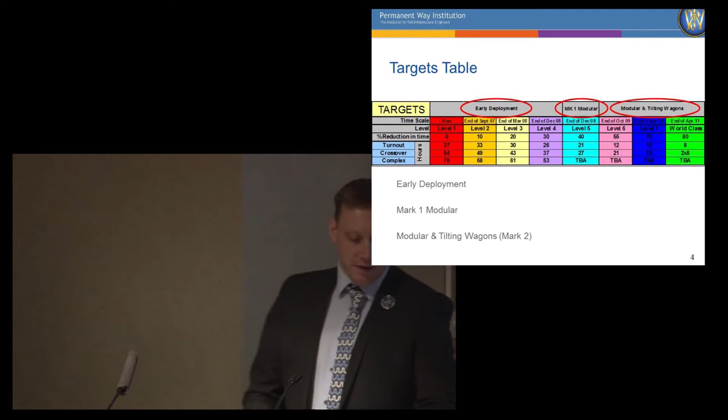Just to give you a quick overview of what the table represents, it's split into 3 sections. The first section being the early deployment, the second being Mark 1 modular, and the third being modular and tilting wagons, which I'll explain in a little bit more detail in a moment. If we just look at the top there, the level 1 on the red on the left-hand side, what this was basically about was installing the turnout there, as you can see on the left.

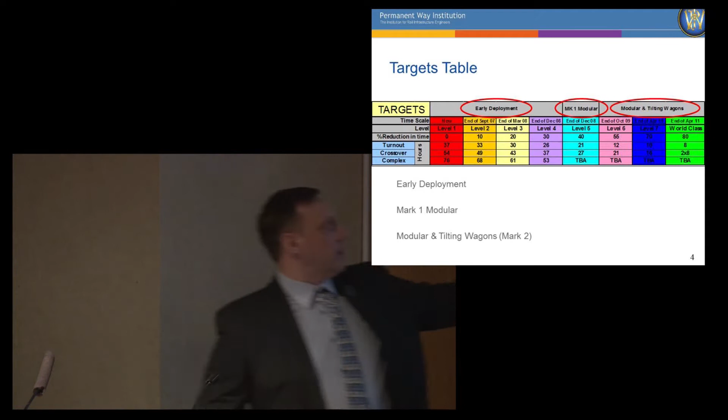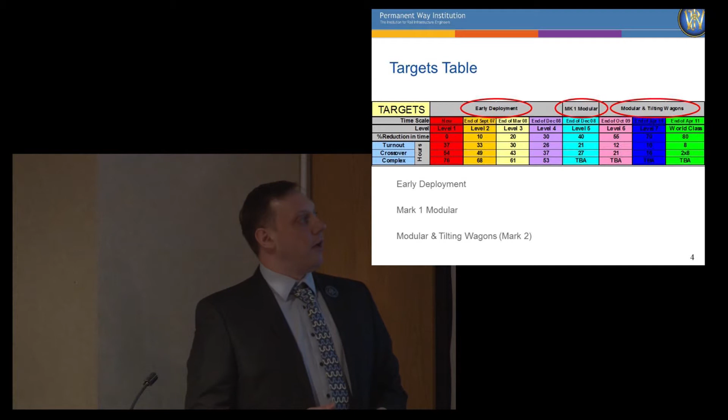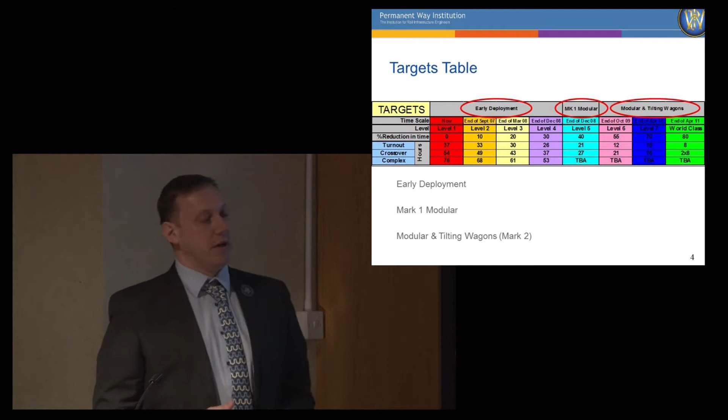In 2006, we were commonly installing a turnout in 37 hours, and again to suit the 7-day railway aspirations and benefit from the modular tilting wagons all the way across to the right-hand side on the green, on the same level of the turnout, we were looking to deliver world-class track renewals in 8 hours, 8-hour possessions, which is basically an 80% reduction in time. So that was the challenge, and everything in the middle were the steps towards achieving them.

So if you look in a little bit more detail at early deployment, the first phase. Early deployment, the dates for achieving some of these targets was 2006 to 2008. And it was generally surrounding behavioural changes only. There were no real new tools or plant, no new processes or technologies. It was all about getting smarter and challenging production rates. So like it says, it was behavioural changes.

Progress Rail were kind enough to allow us and Network Rail to use their facilities at Beeston, where we could go down and basically a big train set was there and we could play with production rates, machines, trains, you name it, and we could benefit from that. Thanks to Roy and the team and Tim for allowing us to use Progress. We got good.

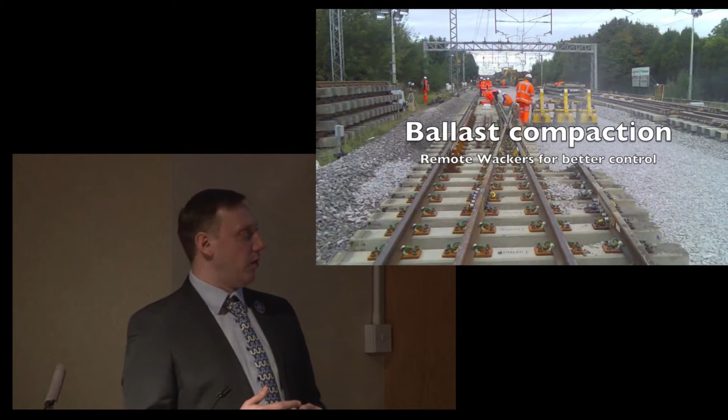Tandem lifting, we had individual lifting beams, which was harder to control before the introduction of the modular beam. But again, a benefit, the 3D ballast control gave us great ballast levels. We introduced the guide plates for quicker installation of panels, and the ballast, nothing new really, other than the technology behind the remote triple Wacker systems giving us great ballast compaction. So they're just a couple of pictures of Crewe Coal Yard and Mossband.

So, the final stage of modular was the Mark II modular. Target date to achieve some of these was October 2009 to April 2011. Again, modular split bearer, and it was the introduction of the tilting wagons themselves. It was where things got a bit more exciting and competitive, if you like. There were challenges, and it was definitely a great honour for Babcock to be one of the first contractors to install this. So we were looking forward to that.

They were installed on site generally by Tandem 250 system with the modular beam. Like I said, the introduction of the modular beam came then, and it's where all previous training was put together to create the most efficient work site.

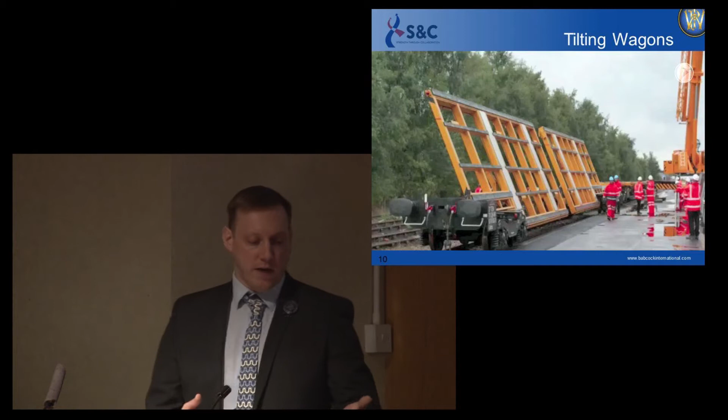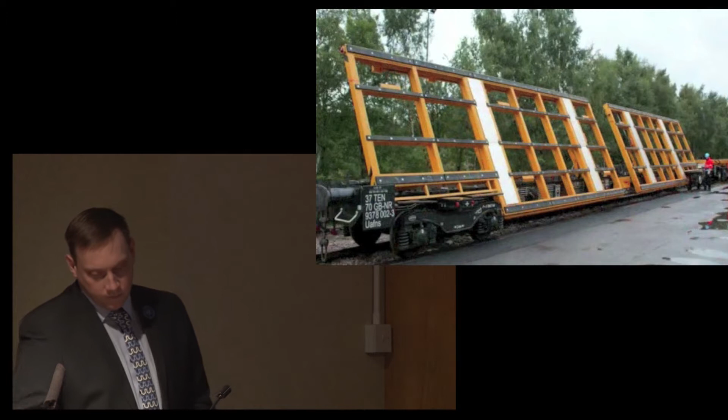Okay, for those that don't know a great deal about the tilting wagons, I know they've been around for some time now. Some people may have had the opportunity to see them, some people may not. I've got another video here that demonstrates what the tilting wagons look like and how they operate. So they're just in the tilting mode that's engaged to get to site at the moment. Just a few captions on there, highlighting the modular beam. Then the cross beams attached to the modular beam.

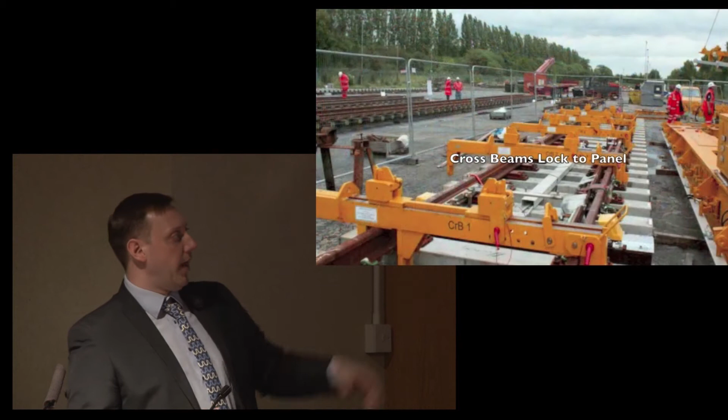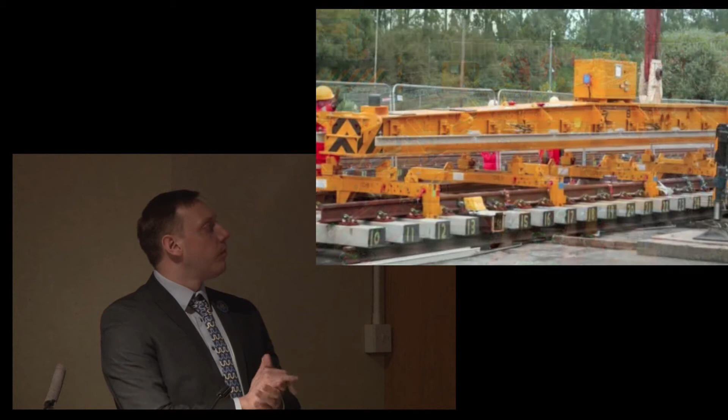The cross beams actually lock into the panel, and then the modular beam comes and locks onto the cross beams. And then the cross beams actually lock to the tilting wagon itself. Locks the panel to the tilting wagon. And this is actually the tilting wagon in action. Tilting to the transit position, it says there. It is being lifted there.

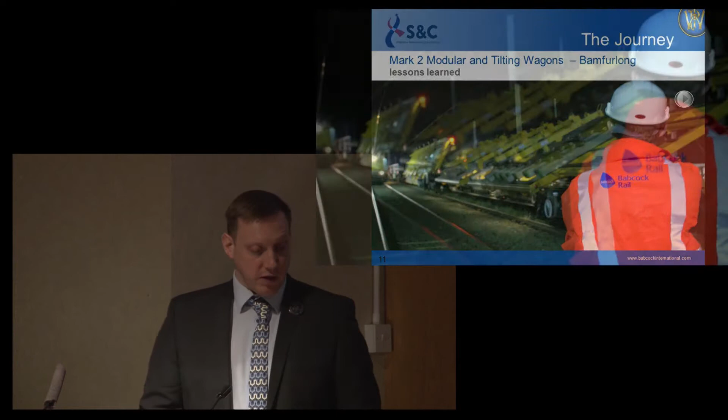Tilting wagons before? There you go, that's how they operate. Moving on. As Roy mentioned at the beginning, as he introduced me, the first site in the UK to receive the modular system by tilting wagons was at Bamfurlong in October 2009. I've mentioned already that Babcock wanted to be the first contractor to install that, and I was over the moon to be one of the engineers to contribute to the planning and the delivery of that site.

Another thing that we had to pay attention to was considering the wagon slew. As the wagons go flat, they slew out to the left or the right. We need room to run the gear off cranes or whatever up and down one side, and make sure there's nothing in the sets to foul, or even if we work in ALO. As I said before, this was the introduction to the Trimble equipment, using 3D surveying equipment. Just a picture there of the rail front that we're trying to set out.

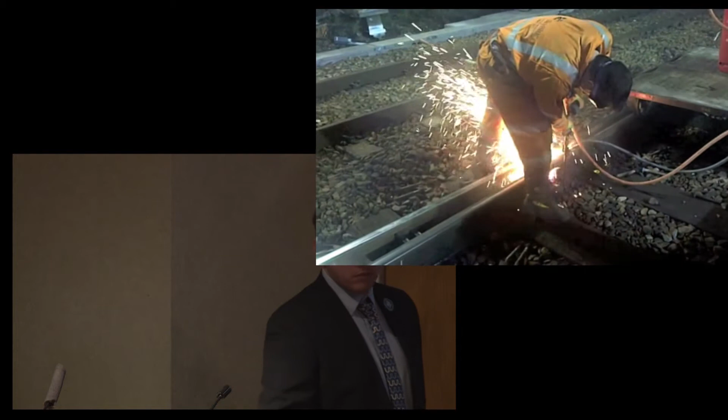So yeah, no flame cutting. Just stress the fact that every first cut that we do is always flame cut, so any stress in the rails disperses in a controlled fashion, rather than if you cut through with the disc cutter, it just snaps open. We do use both from the initial flame cut. Just showing you there that the chosen scrapping out method was using one of the Kirow 250s, which we use over end, and the 3D formation there, showing the dozer pushing through, controlled by the 3D, giving us quite a decent formation level.

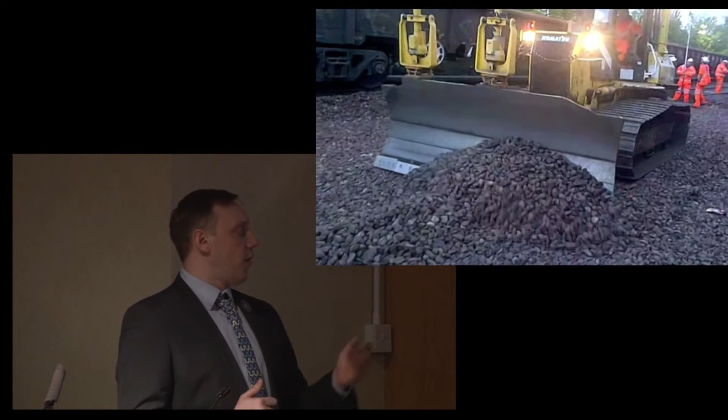And we've got the same 3D controlled bottom ballast. One of the benefits for me: when we used 2D lasers, we used to have to do what was called a blade and a half pass, because the blade itself isn't as wide as the pig, so you have to come back and do a half blade pass. When you did that half blade pass, it always used to leave an irritating little ridge down the middle that you just couldn't quite get rid of. So the 3D Trimble's got rid of that, which is obviously a great benefit for the modular installation.

And that's literally the first panel coming off tilting wagons there, being loaded at Babcock. So that's the first switch panel on the ground from tilting wagons.

This is going to keep going on, isn't it?

Bamfurlong did receive some press. You know, it was a very high-profile site, being the UK's first tilting wagon. So we did get some press release that I thought maybe to show. Wigan says it was 21st century track relaying. We had got onto Network Rail's website: Wigan wagon rolls out renewals in record time. Say that after a fight or two.

Rail infrastructure: first modular switch and crossing installation was undertaken, and then one that I'm proud of because I took that photograph, Rail Engineer: tilting wagon delivers milestone. So that kind of shows the excitement and importance of that.

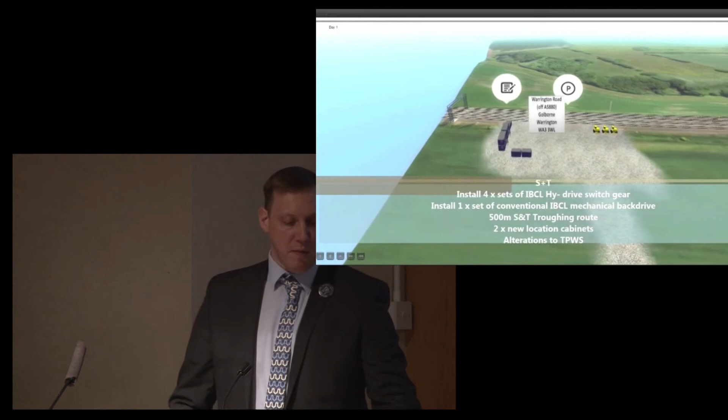I think I'll stop it there anyway. That's basically the end of the first site at Golborne. It goes on to show the other 3 sites of the West Coast Main Line, but you get the general concept. It gives people a quick and concise overview of the actual geographic location of the site, where the welfare facilities and access are located, and also the work content. Quite a simple concept, but it did provide the overview that we ultimately wanted.

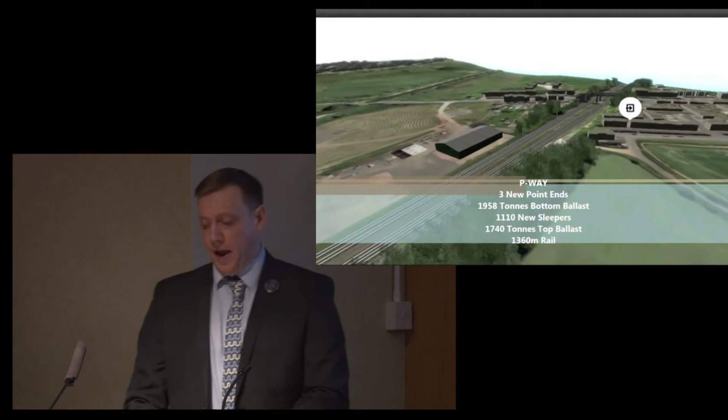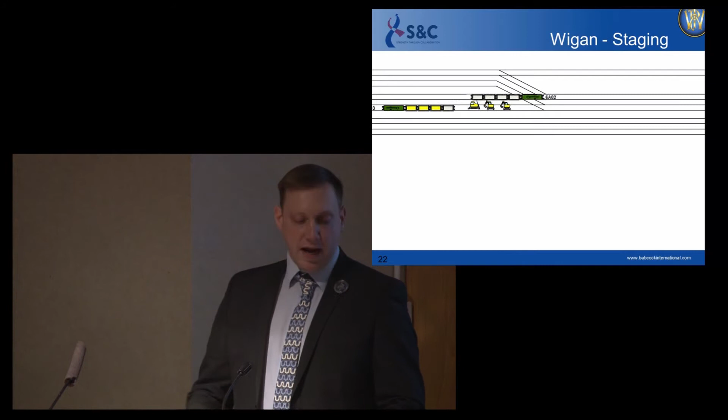I'll touch a little bit more on that in a moment, but we then went on to speak to Salford to work on how to better demonstrate methodologies. Historically, methodologies were presented in this kind of format. So in the whiteboards, to present how we actually carried out the track renewals and what process it followed, we just show simple Microsoft PowerPoint presentations that show where trains, where machines are supposed

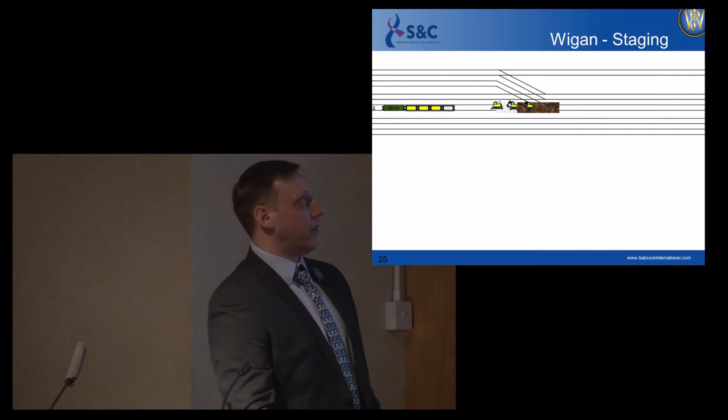to come from, and then it basically just follows the linear process of how we start scrapping materials out to trains, how we start digging, and then, like I said, it works through in a linear fashion. Very simple, but that's really the idea, and it helps people understand exactly where trains and how plant and things operate and move on site.

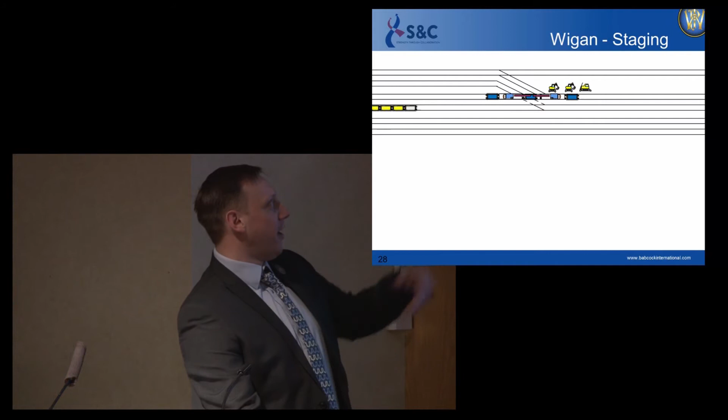And that simulates machines magically moving across the rails. And also the installation, yellow highlighting tilting wagons, installing the S&C there. So quite a powerful tool really, simple but quite powerful in the ability to demonstrate exactly how we're carrying out the track renewals works. Another tool that we use, and we've used for some years now, is the bar charts.

These bar charts will literally go down to 3 minutes for every activity, including disc cutting, flame cutting, and all the methodologies and how we're scrapping things out and how long they take. So them two combined actually create quite a powerful tool to demonstrate how we're carrying out the works.

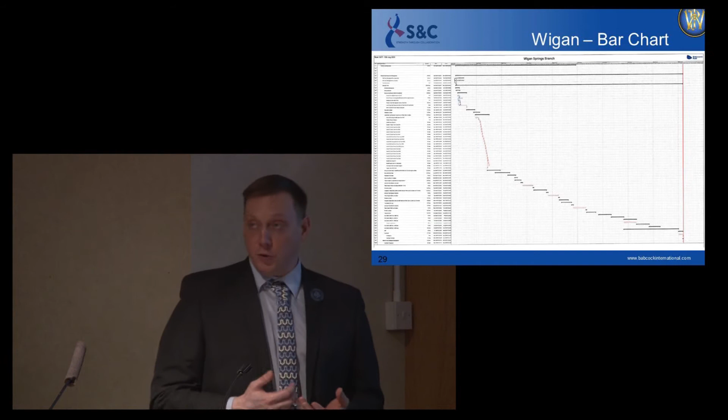Just going back to what I was mentioning about Salford University, we wanted to combine the PowerPoint and bar chart to produce a 4D virtual model to interact with, to learn and to monitor progress. So after lots of hard work alongside Salford University, we've been able to produce this following footage. Again, this was with BIM in mind, just to introduce the virtual aspect of track renewals, to give people that overview.

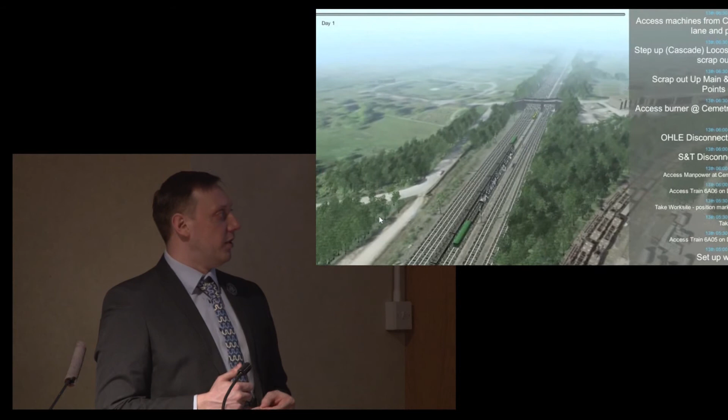So this is Wigan Springs branch. We'll stick with Wigan Springs branch now for the West Coast Blockade. It's going to be the focus in the remainder of the presentation. People may be wondering what the 4D, the fourth dimension, is to 3D. The fourth dimension was the addition of time. On the right hand side you can see the activities being undertaken on site. So there we're loading scrap rail, sleepers and S&C to train 6A02.

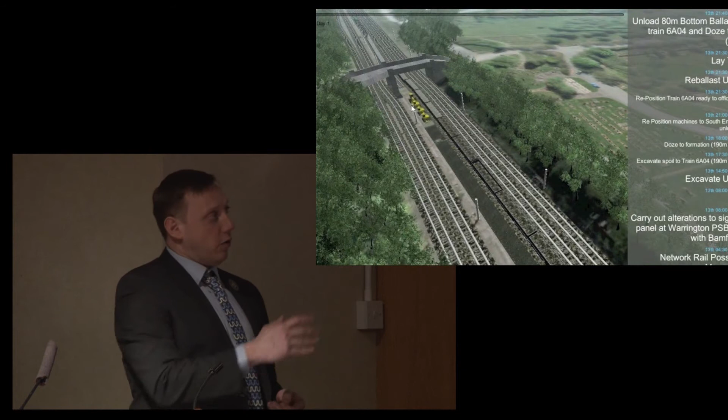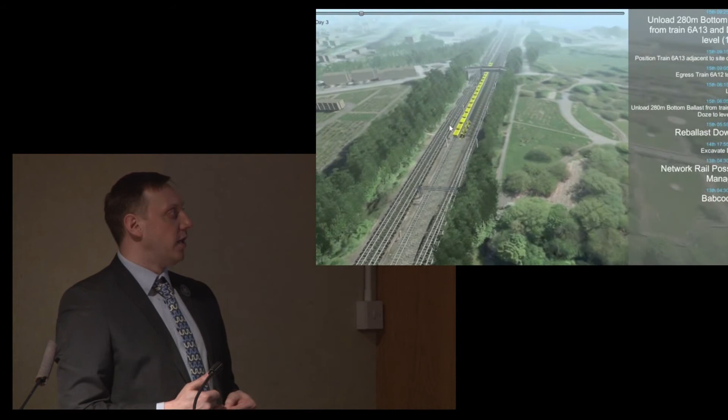That information was taken from the bar chart, incorporated into the staging videos, and everything's running in real time. So one of the benefits from this is it paints a picture for people along with the time. People were able to take this video away and learn the blockade in their own time if they liked. But it definitely painted a picture of how the 4 sites combined were going to be implemented.

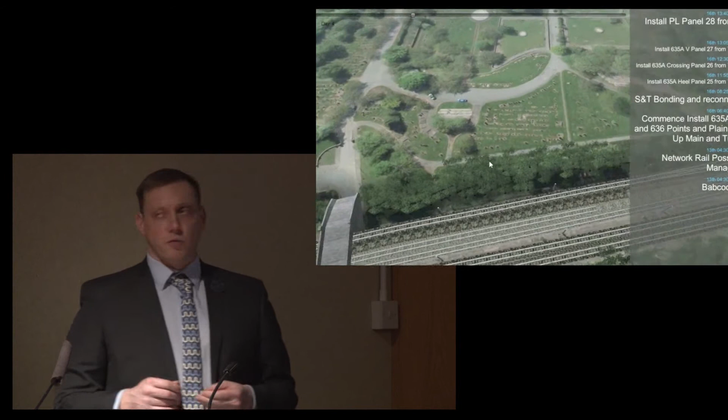Going forward, we want to adapt on this and continue to use this method of demonstrating methodologies. What I'd like to see is in operations rooms, such as those at West Coast Mainline, to be able to run this video footage in real time, so that people inside can see exactly what's supposed to be happening on site at what specific time.

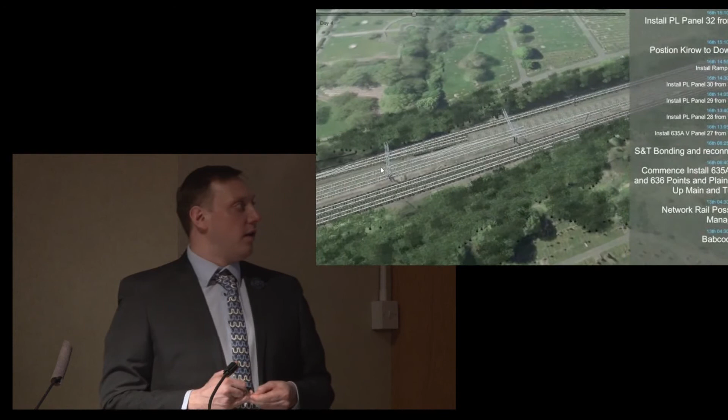I'd also like to adapt it in a way that, should there be any program slippage on site, there may be some form of input mechanism to the software to calculate a new methodology or strategy going forward and see what impact that has on the site, whether it would overrun or be completed successfully. I'll continue to work with Salford University to adapt and introduce that technology as soon as I can.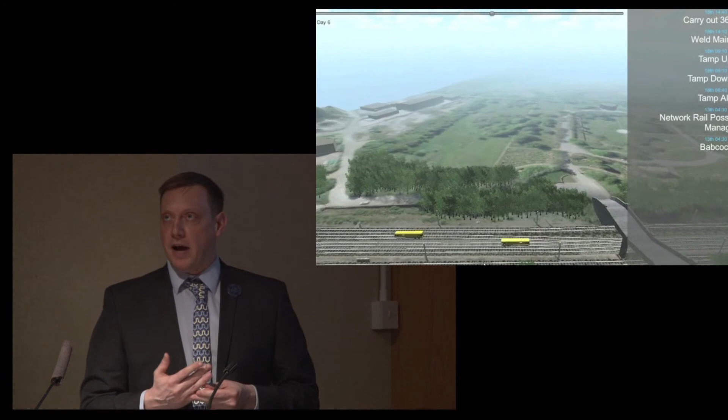So you've seen how we've used some of the management techniques and new technologies to plan the blockade works. I'm going to stay with Wigan Springs branch till the end of my presentation and discuss the 80-mile-an-hour handback that we achieved in July last year. So if we move on through the presentation, that gives the existing speed diagram at Wigan Springs branch.

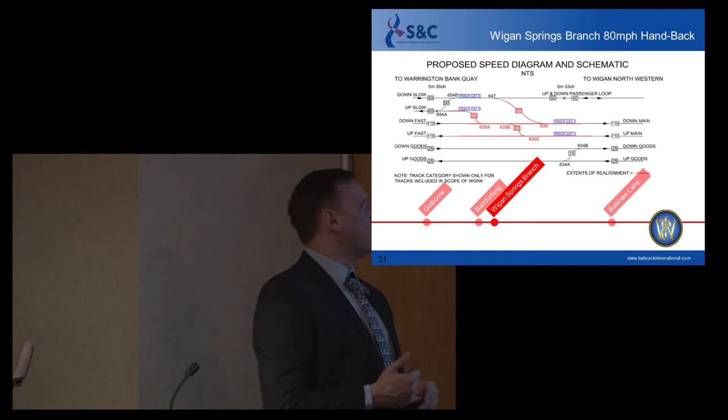It shows you basically a double junction there with 50-mile-an-hour turnouts, 110 mile an hour on the main lines, 50 and 60 mile an hour respectively on the down slow and the up slow. That's the proposed track layout. You'll notice that there's no real requirement for speed increases. It's basically opened out into a series of turnouts and a crossover for passenger comfort and better maintainability.

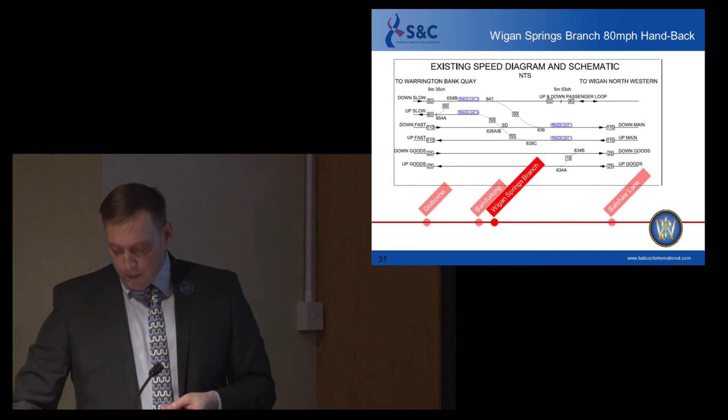So, moving forward, we had to plan how we were going to adopt the 80-mile-an-hour requirement. We were challenged to open 80 mile an hour TSR following S&C renewals at Wigan Springs branch. We asked why it was Wigan Springs branch, and the reasons being that there was no poor formation history, it was on a straight track geometry, and it was on one gradient. It was also at the front end of the programme where adequate time was available for multidisciplinary works, and also it gave us a bit more time to dedicate to track quality.

So the strategy was to engage industry experts and key suppliers, including Babcock, Network Rail, Korec, AP Webbs and A-Plant, amongst other people, but these were more the people that could actually have an impact on site. We established workshops and discussion groups early in advance so everybody knew exactly what the mission was and how we were set about to achieve them objectives.

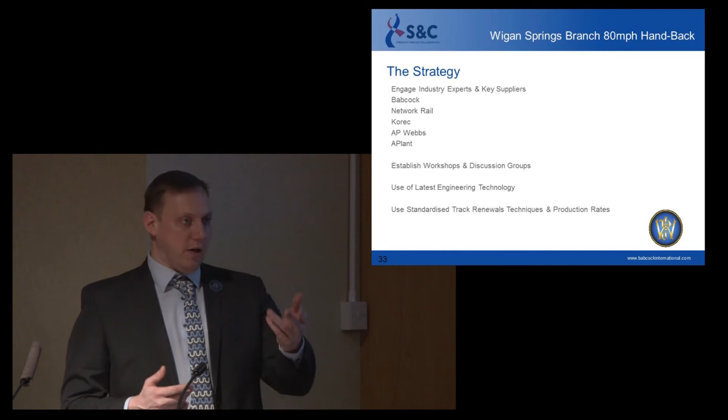I mentioned before that we use latest engineering technology, including 3D and Trimble. An important one at the bottom was just using standardised track renewals techniques and production rates. Again, we weren't using anything out of the ordinary. It was just something that we adopted from the early deployment and modular days that we stuck with where we get best efficiency. Can't forget the teamwork.

We had a dedicated team of engineers and site managers, dedicated plant operators, and track gangs and dedicated Kirow operators as well. They engaged in regular team meetings and briefings to understand their responsibilities and requirements. So everybody kind of bought in early, like I've said, and understood the process through to the end.

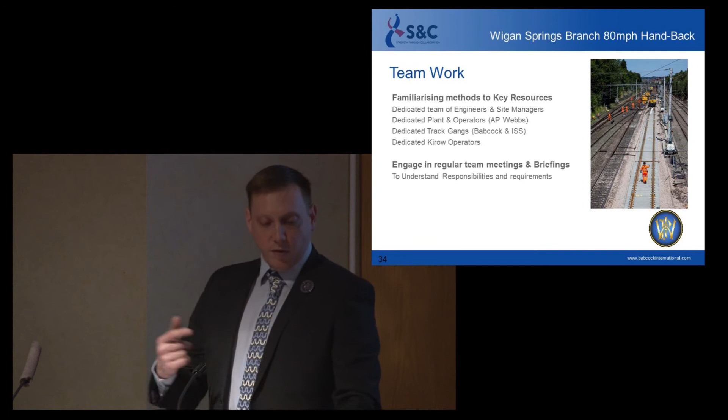When we look at the project delivery, as far as excavating and bottom ballast goes, we use Trimble 3D SCS900 dozing to achieve design levels and automated dozing. The design has also included ballast ramps within the dozer files, something that's caused us some problems over the past where we're spinning dozers and trying to sort out ballast ramps. They're actually included in the dozer file, so the dozer can actually follow and put the ballast ramps in itself.

We engaged AP Webbs operators for best production rates. So in essence, we just got the best people for the job on site to get the buy-in and the best production rates. We used the triple whackers for even compaction. We even whacked the ramps. Just a comment there that I've missed. We also adopted 2D lasers as a backup. Everything was set out at 5 metre offsets as opposed to the normal 10 metres on a straight that we adopt, and that gave us better track alignment and levels.

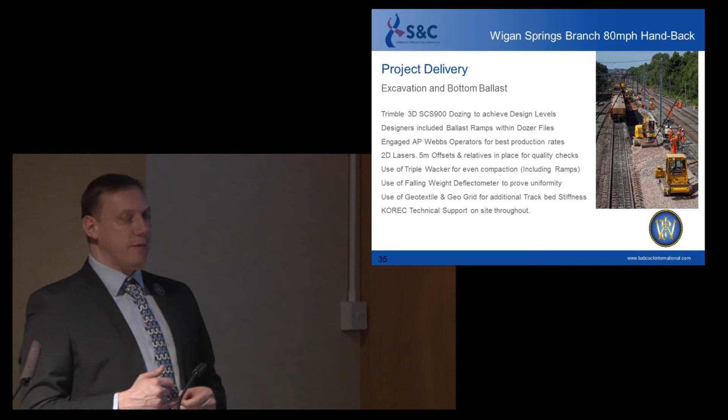And we also introduced the falling weight deflectometer to prove uniformity. I'll touch on that in a moment, but the falling weight deflectometer just measures the stiffness of the ballast. We also used the geotextile and geogrid for additional track bed stiffness where required. And an important note there that Korec, who provided all the Trimble gear, were on site 24/7 with technical support, because we understood the importance of having to install the track with the 3D equipment. So just a quick demonstration of what the falling weight deflectometer is.

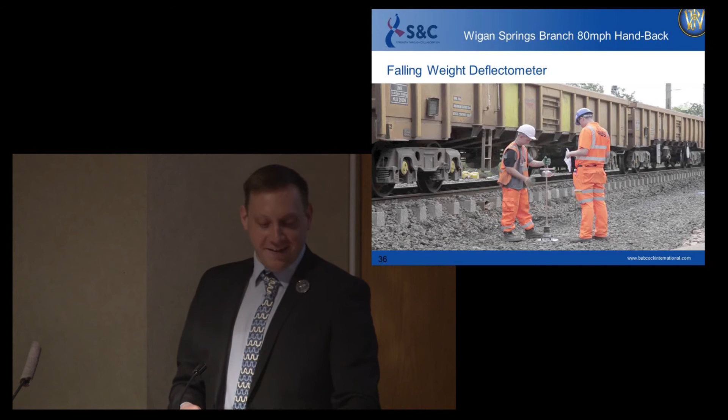Right. This is the best one. Slow motion.

I actually did a PWA technical seminar up in Glasgow a couple of weeks ago, and it did raise quite a lot of interest, the falling weight deflectometer and how we used it. I'll go through it in a little bit more detail in a minute.

You don't want to see it again, do you? Do we? Just catch up.

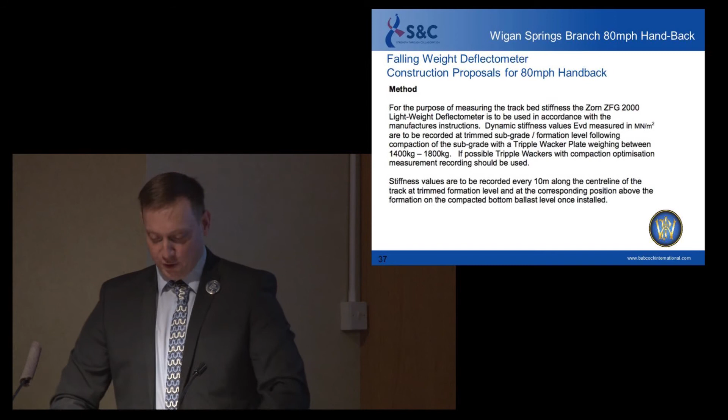So, this was an extract from construction proposals for the 80 mile an hour handback that was put together by Colin McAteer, one of our engineers, and it basically says, for the purpose of measuring the track bed stiffness, the Zorn ZFG 2000 lightweight deflectometer is to be used in accordance with the manufacturer's instructions. Dynamic stiffness values are measured in meganewtons per metre squared and are to be recorded at trimmed subgrade formation level following compaction of subgrade with a triple Wacker plate weighing between 1400 and 1800 kilograms. Stiffness values are to be recorded every 10 metres along the centre line of the track at trimmed formation level, then the corresponding position above the formation on compacted bottom ballast level once installed.

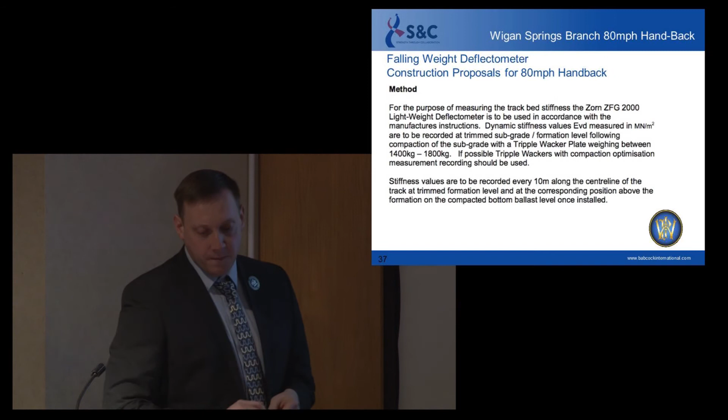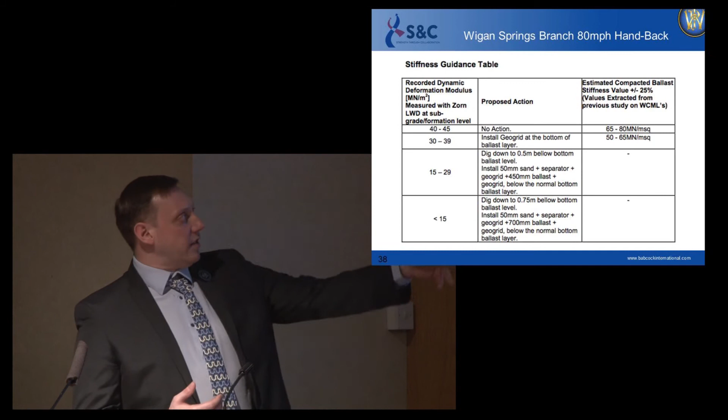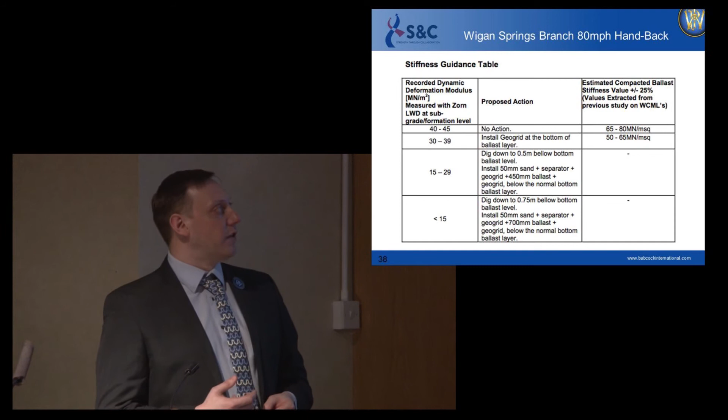There's different proposed actions as we get better track stiffnesses, but generally on the right hand side there, we've got estimated compacted ballast stiffness values from previous studies of the West Coast main line, and they were generally coming out between 50 and 80 meganewtons per metre squared. So they were just guidelines really.

So again, it was more the uniformity. We were using the weight deflectometer to measure through the site to make sure that each spot that we were measuring was giving us the same values. And it was about collating data this time round rather than using fixed data to prove actual ballast stiffness.

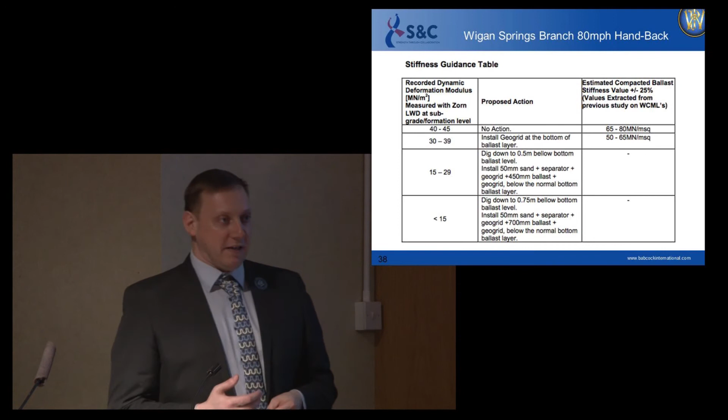So, S&C installation onto the new ballast bed. We just adopted the normal tilting wagon delivery. We used the Kirow 250 tandem installation, and all the track panels are pre-built at the suppliers and delivered direct from the manufacturers for better quality. All the installation was Trimble guided again.

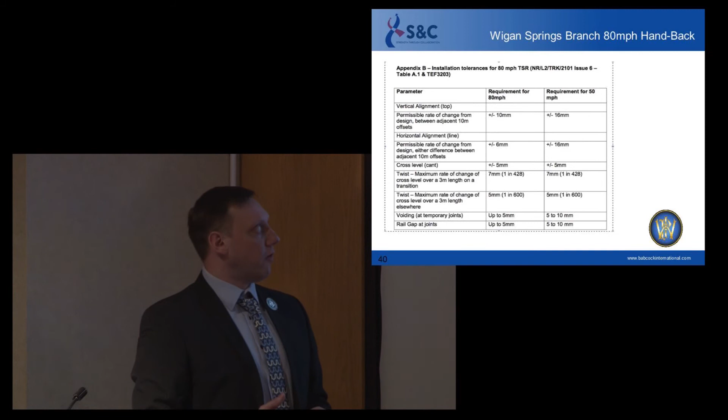Top ballast was distributed in the same way as normal from auto ballasters. Construction tamping by two S&C tampers that were connected to tandem tamp through the S&C long bearer section, connected through the umbilical cord. And the front offset files were created again on the ALCs, an automated device on the computer that you can input on the tamper.

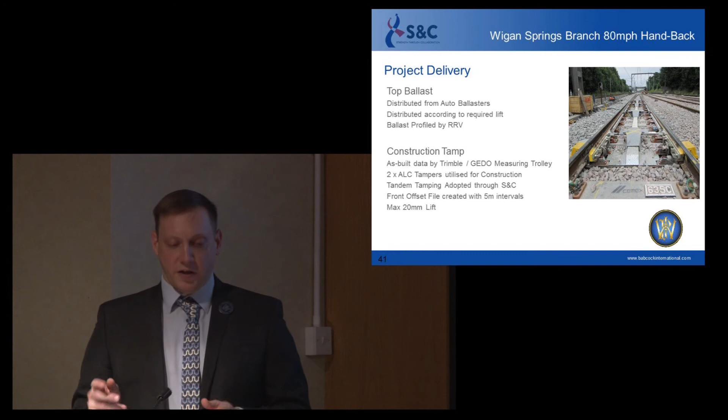Again, usually, specifically on a straight, we put them in at 10 metre intervals, but on this occasion we put them at 5 metre intervals, which gave us better track quality outputs. We also adopted the maximum lift of 20mm where required.

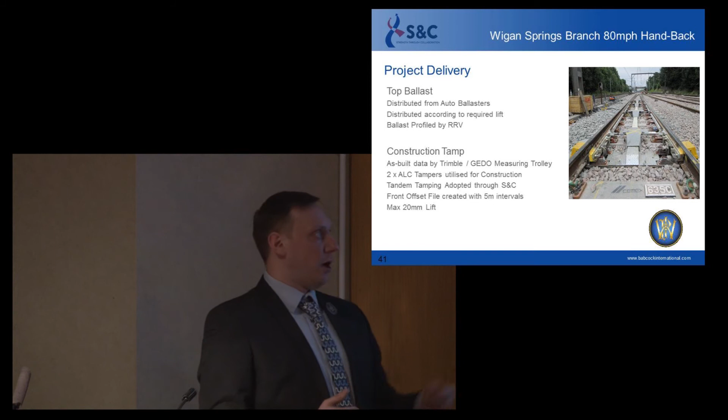So then just move on to actually achieving the 80 mile an hour handback. Just to mention there, one of the things that did benefit the 80 mile an hour handback, the 9-day blockade on the first Monday, Tuesday and Wednesday evenings had freight traffic going over where we had to suspend the work site to pass key trains. So that obviously benefited and contributed to better ballast compaction. We also were able to fully weld all the site.

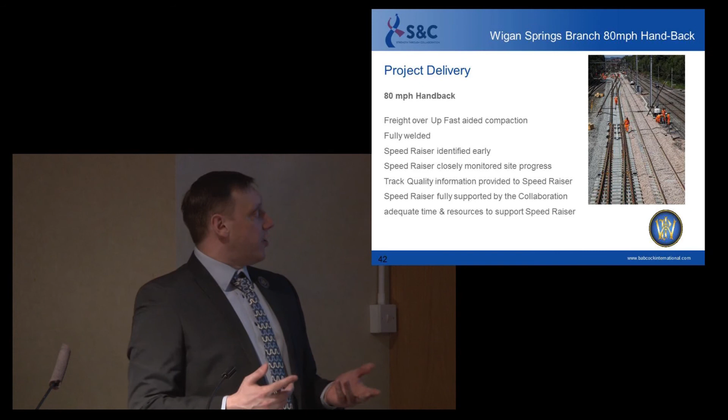The speed raiser was identified early, so we had the complete buy-in support from the collaboration. The speed raiser also closely monitored site progress from formation through to bottom ballast and installation. And like it says, he was fully supported. Track quality information was provided to the speed raiser, including early heights and staggers. We're using the GEDO trolley to provide information such as twist and gauge to give the speed raiser more confidence that track quality was high. And more importantly, we gave adequate time to the speed raiser to carry out its checks.

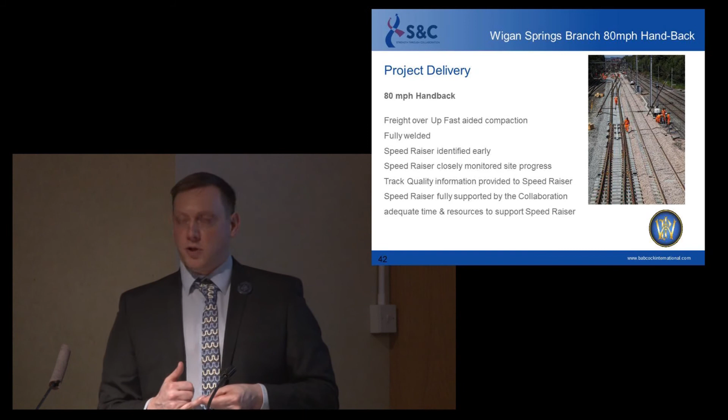Once we had the successful handback at 80 mile an hour, we obviously didn't leave it there. We had some contingencies in place. Sorry, I'm just one step forward.

Twist checks. S&T were on site for rapid response should there be any sort of points failures. And ops support was fully available for any line blockage requirements should any of the track quality deteriorate. We also had tampers on site at Wigan Springs branch which were there ready to be deployed again should the track quality start to deteriorate for the 80 mile per hour handback.

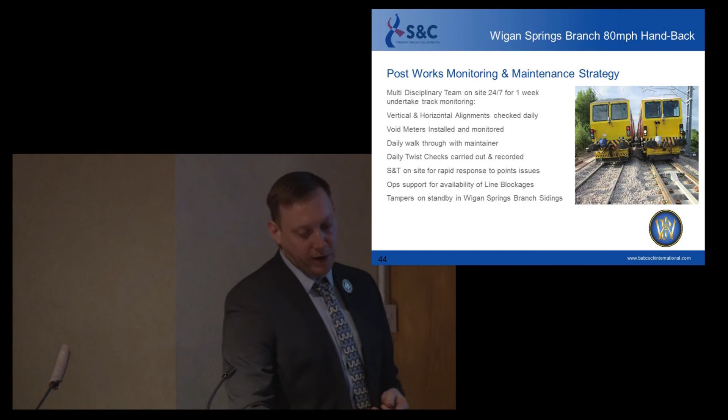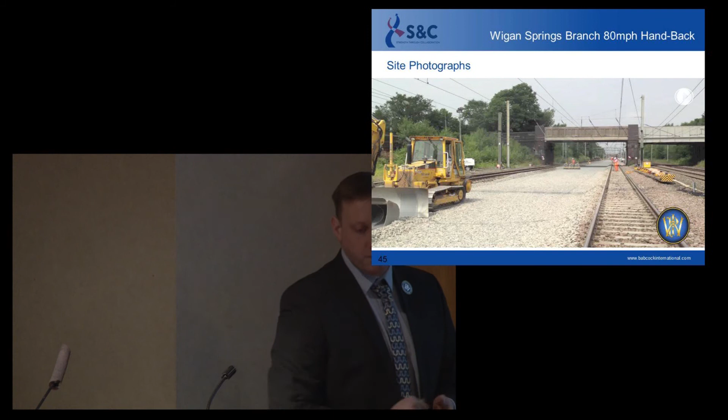So post-track quality recordings. If we concentrate across the top band on the first eighth, we're looking at the wavelength 35, AL35 wavelength. We've basically got a 0.62 standard deviation, which in simple terms is the ballast kind of stiffness, if you like, and the track quality. We've got 0.62 of an SD 4 hours after the blockade.

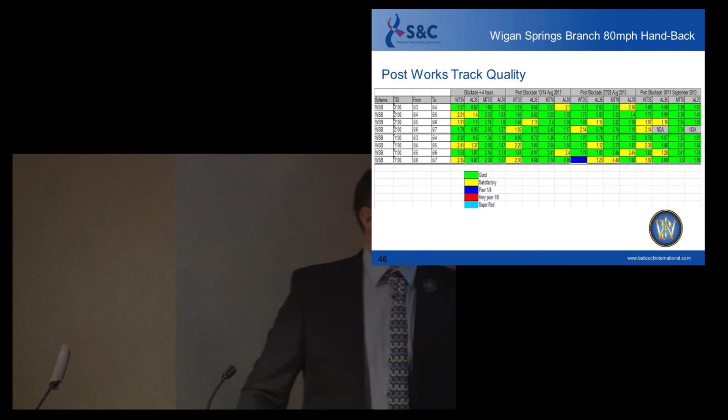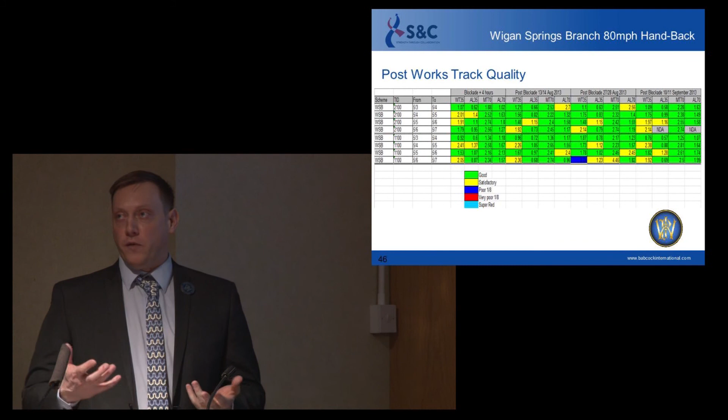About 3 weeks after on a follow-up tamp, moving across to 35 again, we've got 0.66. About another 3 weeks later, we've got 0.63 SD, and then moving across again, we've got 0.58, which is obviously getting better. What that highlights, you've got a lot of green on there, and also the ballast stiffness and track quality was holding up, so we did something right as far as the track quality goes and the installation of the bottom ballast. So that pretty much brings me to the end of my presentation.

I've got one last video to show you, which again is Babcock's promotional video of the West Coast blockade and the successes of it. I think it's just the phrase, the best blockade ever. We'll do that. Well done, guys.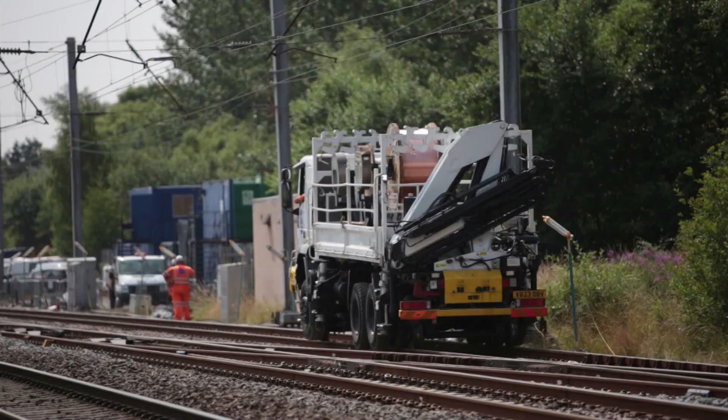My name is Andres Alvarado. I'm an engineer. I work for ISS Labour, and over the past 9 days of the blockade, we've been using the latest in GPS technology to improve track quality. I'm Nav Seeker, I'm the Project Management Assistant for LNW North Track Renewals. We have facilitated industry needs with 3 single line working opportunities through the work to pass key trains. This blockade has improved the reliability of the network by installing new signalling equipment and Hydrive point operating equipment, and we've also removed three unreliable switch diamonds from the network.

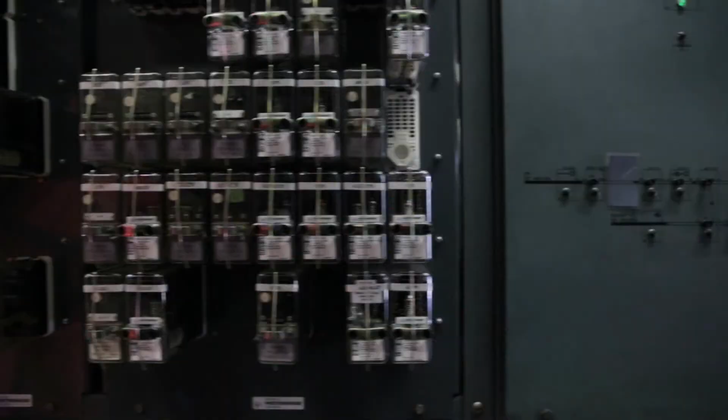Hi, I'm Rob Munro, Project Manager for Development of the S&C Collaboration and Crew. The work here of this blockade is going to improve reliability, increase line speed, and overall give a better customer experience on the West Coast Main Line. We've done this over 2 years in advance thanks to this blockade, and we've done it by working with our collaborative partners, ensuring that our work is to time, to cost, to quality, and most importantly, to safety. I have a very warm and positive view, and what I'd like to be able to do is document the digital blockade and actually roll it out going into CP5, because that's the way to run a blockade.

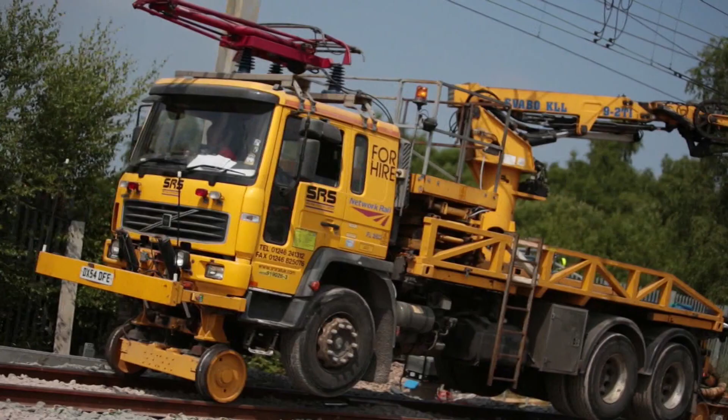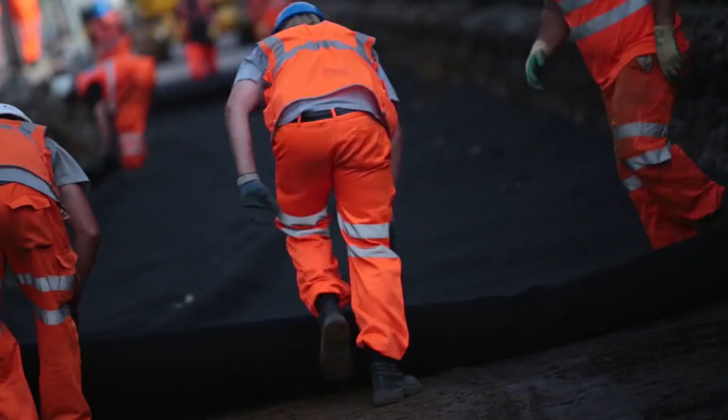The thing that stands out for me is the teamwork that occurred in the planning of the work and during the work. The works were meticulously planned, but you do sometimes get unknown events, and these guys really help. All the work that's done, the blockade is coming back early, our commitments to our customers are met. Absolutely fantastic, first class job.